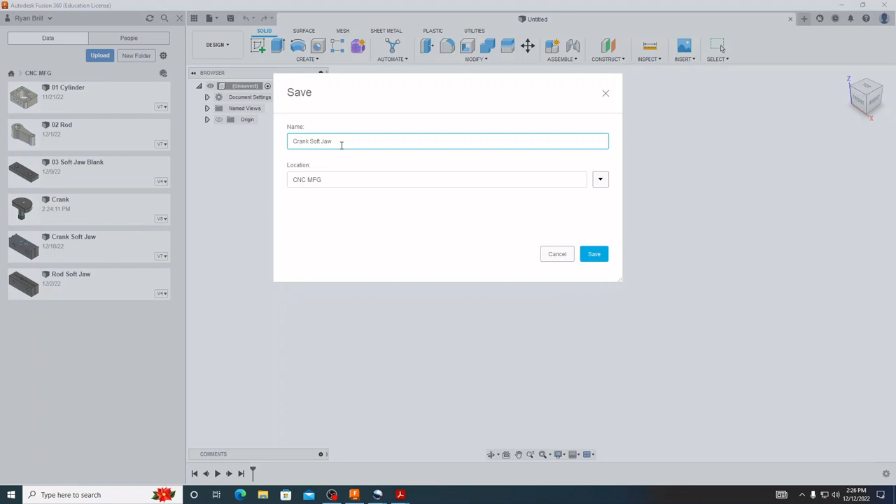Before we can insert our SoftJaw blanks into our file as an assembly, we need to save this file. So I'll call this our Crank Soft Jaw. I already drew this up before, so hopefully it won't give me any errors. I'll just call it 2. And we'll hit save there.

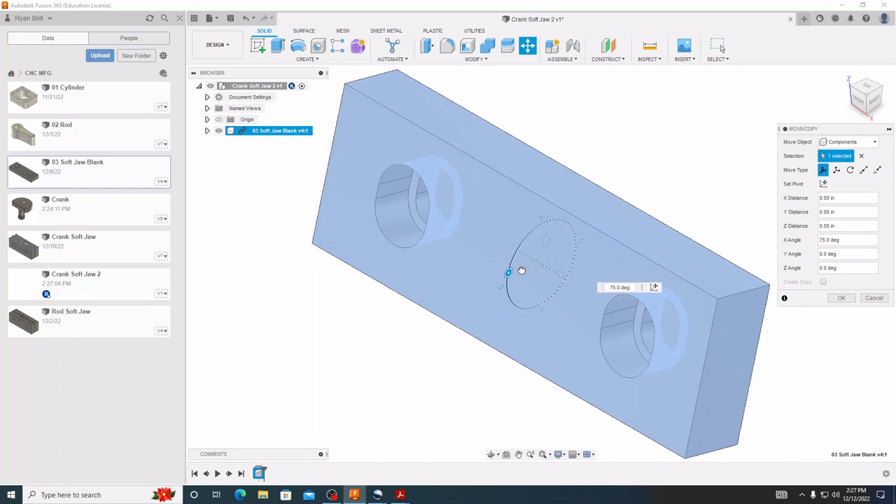To insert this, I right click on our SoftJaw blank and insert into the current design. To do this the easiest way, we want to rotate this. I'm just going to grab that radial right there and rotate it to 90 degrees, then press OK.

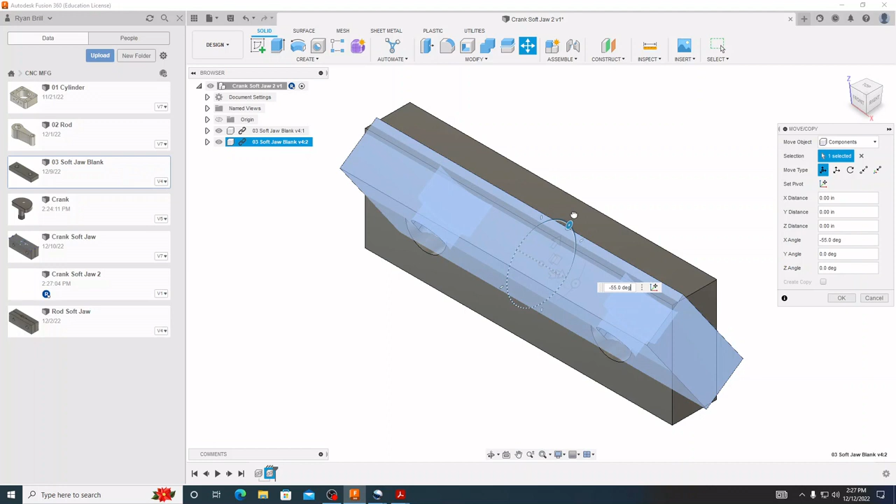Then I'm going to bring in another one and put it right next to it. We'll right click on our SoftJaw blank again, insert into the current design, and this time rotate it 90 degrees going the other way. I'm going to grab this arrow and drag it back, then press OK.

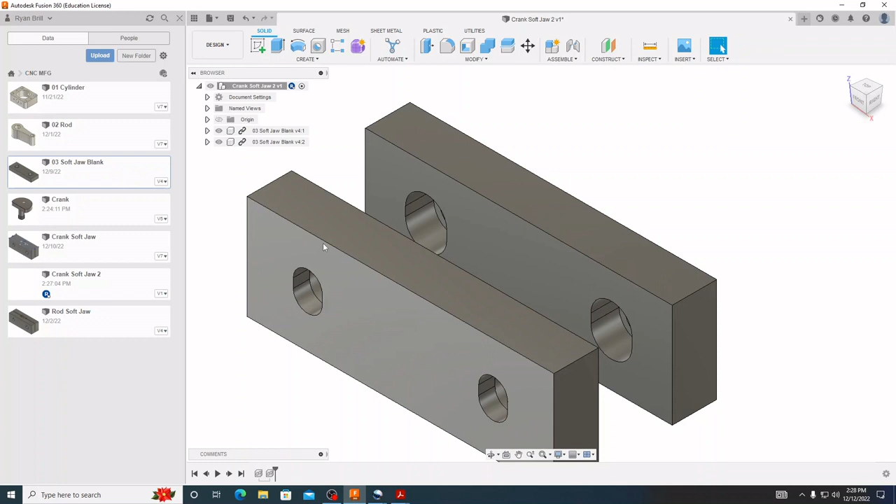The next thing I want to do is break the links on this. Right now, if I were to edit any of these, we could run into errors trying to edit that SoftJaw blank. So we want to make sure these are independent pieces from our SoftJaw blank, so that if we want to continue using the blank to make more SoftJaws, we have a fresh copy to use. I'll right click on the first one and come down to break link, and do the same thing for the second one. Alright, we can close that now.

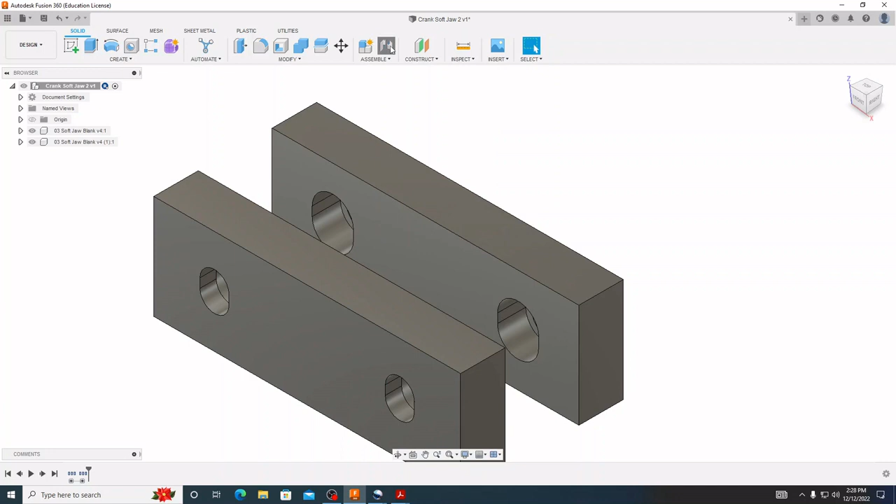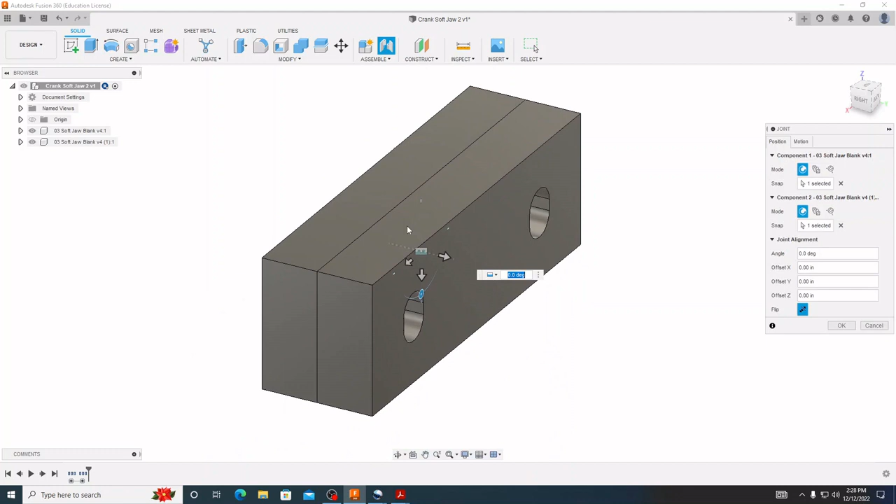What I want to do is assemble this into a joint, using a joint with our assembly. For this, I want to select the center face, or center of that face right there. You can see there are kind of stock box points from when you're running your CAM for your work coordinate system, but I'm going to select that one right there. I'll rotate this around and select that one right there, and it will want to bring it all the way together.

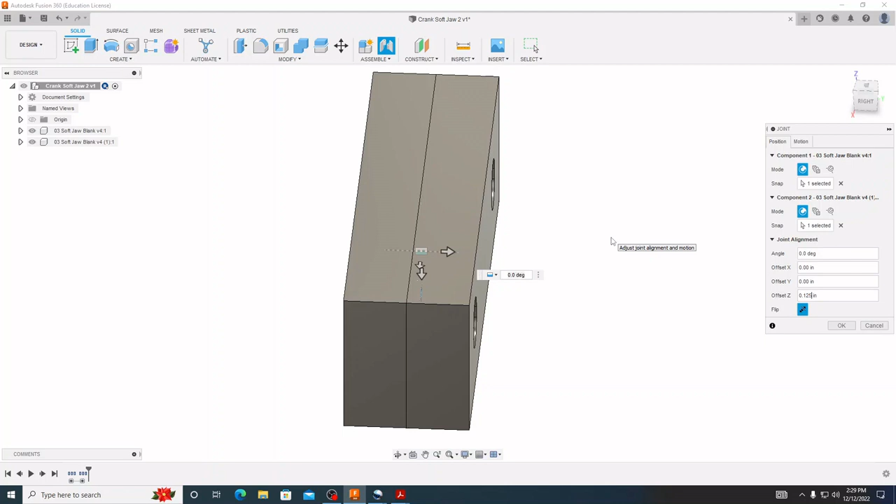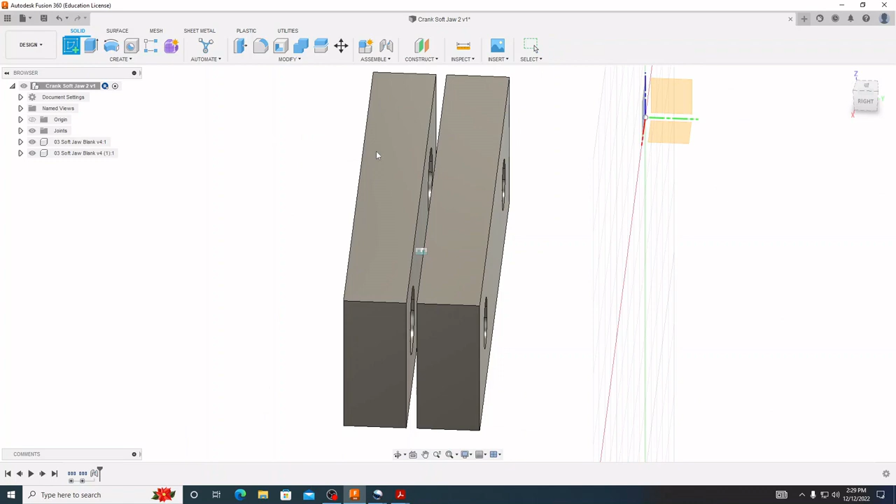The next step is to create this sketch on top of here and be able to cut that down. So back in Fusion 360, I want to create a sketch on the top of our part. It doesn't matter which one you select because we'll be able to use either of them, they're both at the same height.

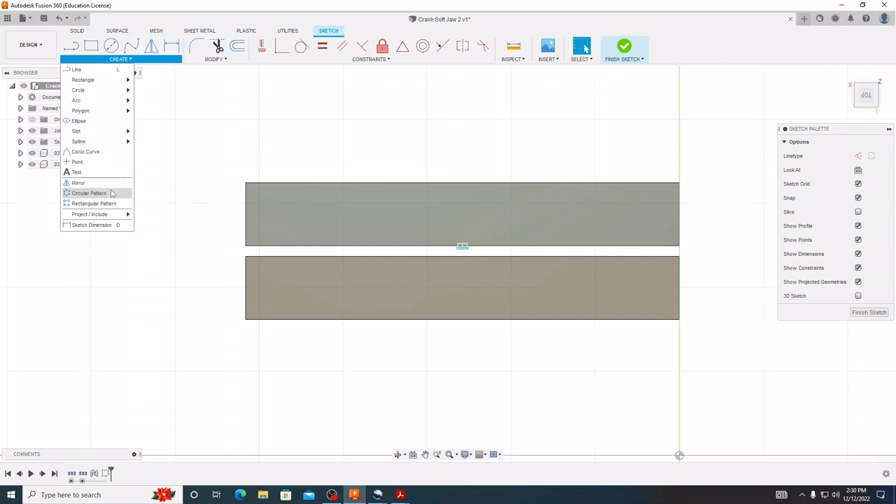Before I start, I need to include both of these to get the geometry. So I'm going to come down to Create, then Project. I selected this one to put our sketch on, and I need to project the geometry from this one as well as that one, and press OK. That will allow us to reference some of the geometry from this.

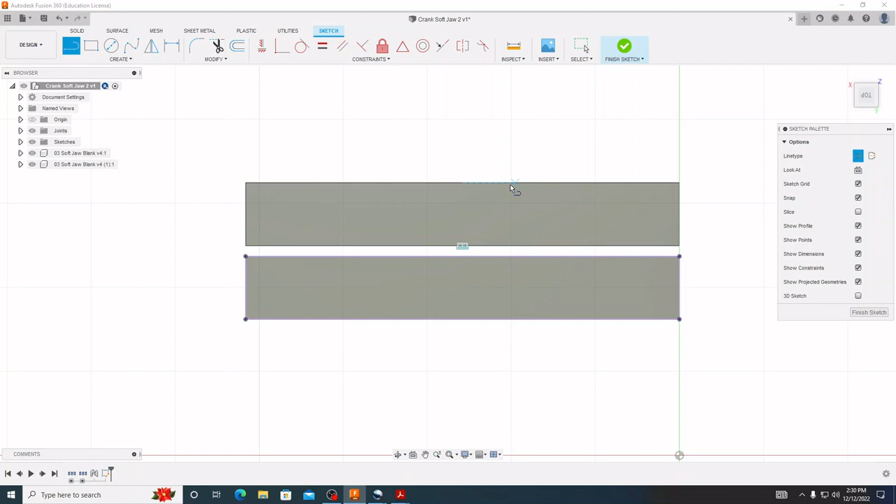I'm going to select my line, make sure we use a construction line type, and come over and find my center of this top one. You know it's the center when it snaps to the center of that line and you have a little triangle next to your X. So I'll click there, and come on down and make sure I snap to the center of this line.

This is very crucial because we want to get the absolute center point of this to be able to put where our cam goes. We'll go back to the print in just a second. So I'm going to take the center of this and draw a small horizontal line out, just to make sure we have a reference. This is going to be the center of our SoftJaws.

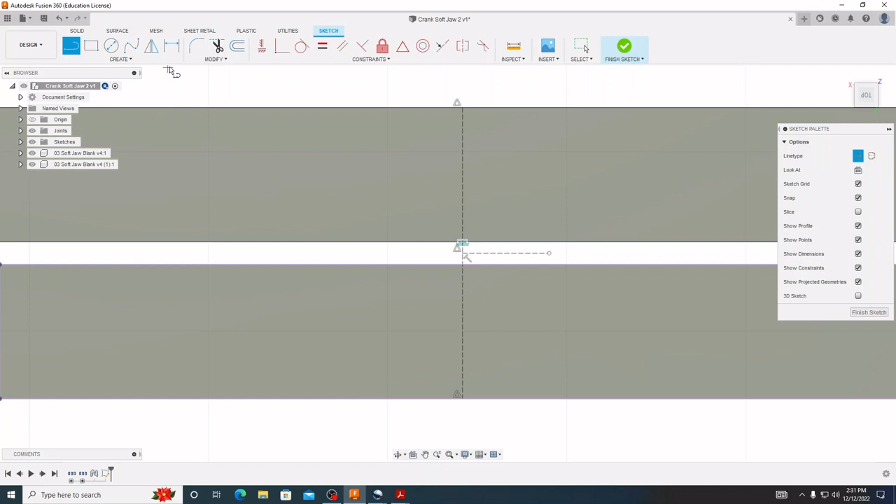That is going to be 0.276.

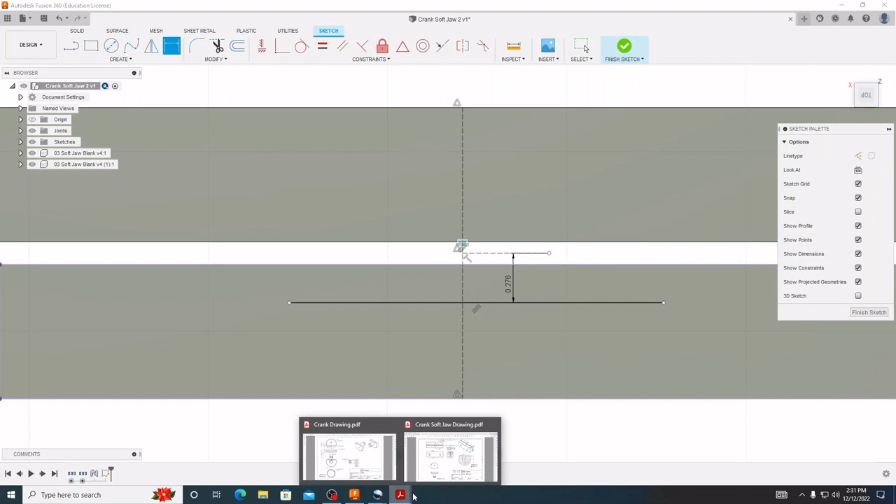So we'll go back to Fusion, and I'm going to create a circle that has a diameter of 1.25. The diameter, getting ahead of myself, the radius is 0.625. Multiply that by 2 and you get 1.25.

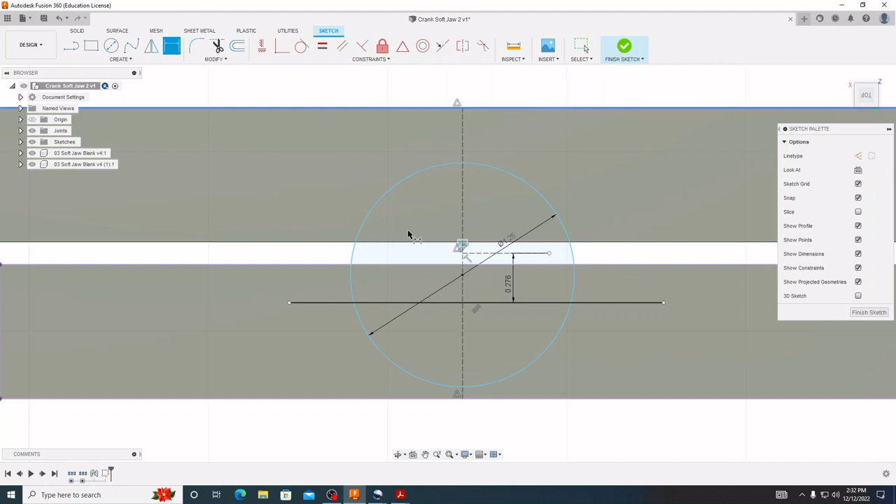So we'll hit that sketch dimension, and we want to go from this bottom line right here to the center point of that, and that is going to be 0.25. So you can see that it's a little bit offset. And when we draw this, that's going to be not only the center of the circle, but also the center of our shaft that goes down there.

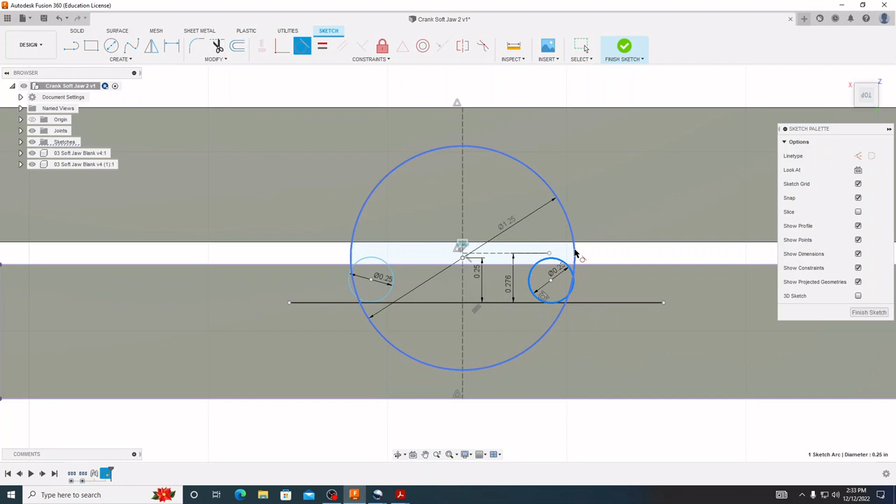So back to Fusion, 2 circles, 0.25 and 0.25, and I will make them tangent to the horizontal line as well as the circle, and same thing for that one. And then we'll be able to come in and trim away all of the lines that we don't need.

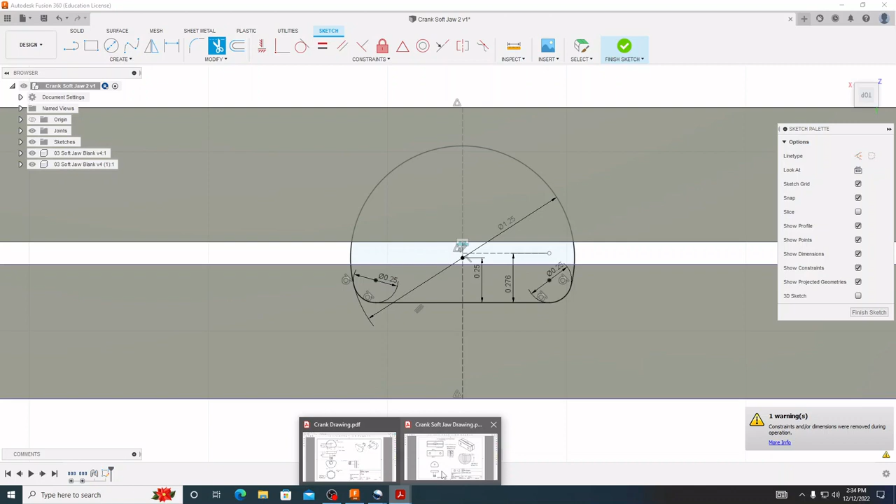And when we are done, we have a wonderful profile. So we come back to our prints, and we can see that it is extruded cut down 119 thousandths.

So back to Fusion, we can finish that sketch. I'm going to extrude all of this, and it is going to go down -0.119, and that's going to be cut into all of them.

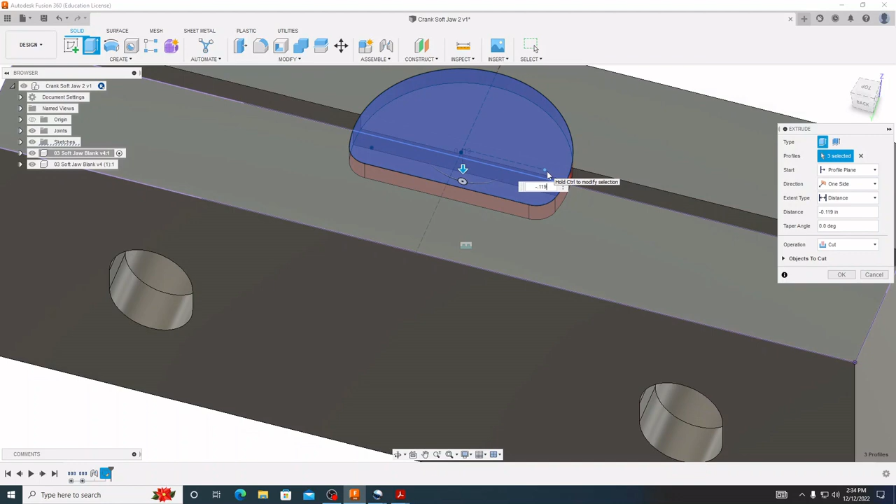The next thing we want to do is create a sketch to be able to cut that shaft all the way down. So I'm going to create a new sketch on the top here, and I want to keep this geometry separate from our first sketch, but I still want to use that center point from our first sketch. So under my sketches, to expand that, you press the little triangle right there. You select the eyeball, which is the visibility, and now I'm able to project that point.

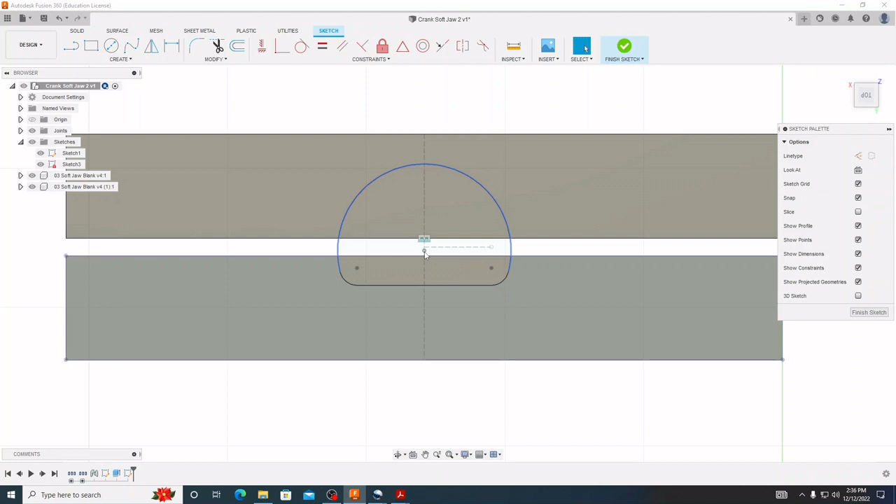And to be able to do that, we go down to Create, Project Include, select Project, and then I want to select that center point right there. And then I can hide that first sketch. And on this sketch right now, I have that center point.

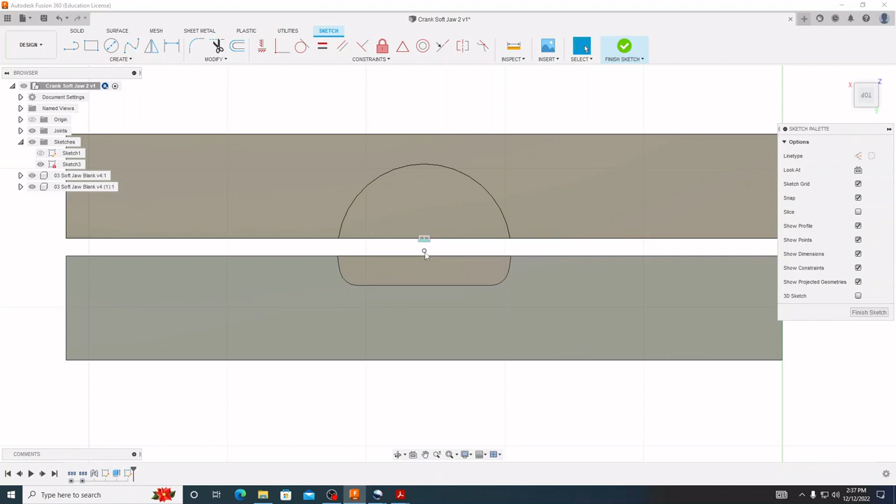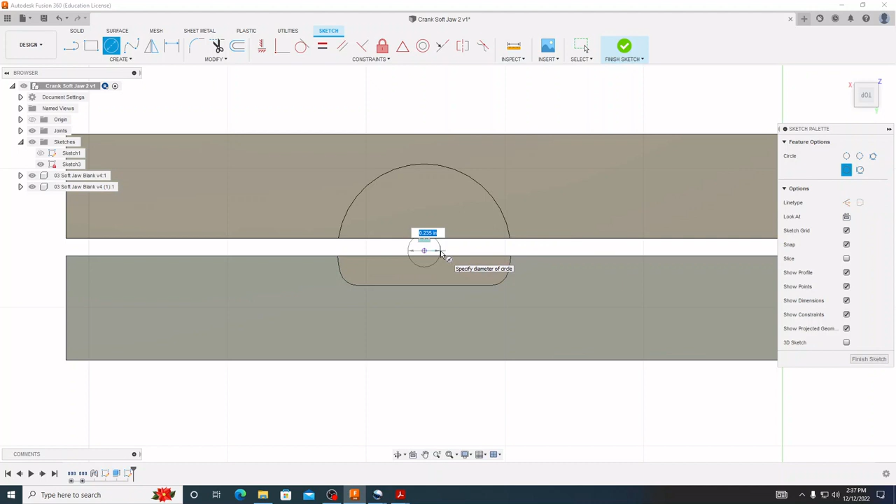So what I'll do then is come back to the print. We can see that has a diameter of 0.375, and that it is going to be extruded down from the top 0.894. So we'll create a center diameter circle from that center point. It's going to be 0.375 or 3/8 of an inch in diameter. We'll finish that sketch.

And as a reminder, it's 0.894 deep. So we'll extrude, cut that down negative 0.894. We'll press OK.

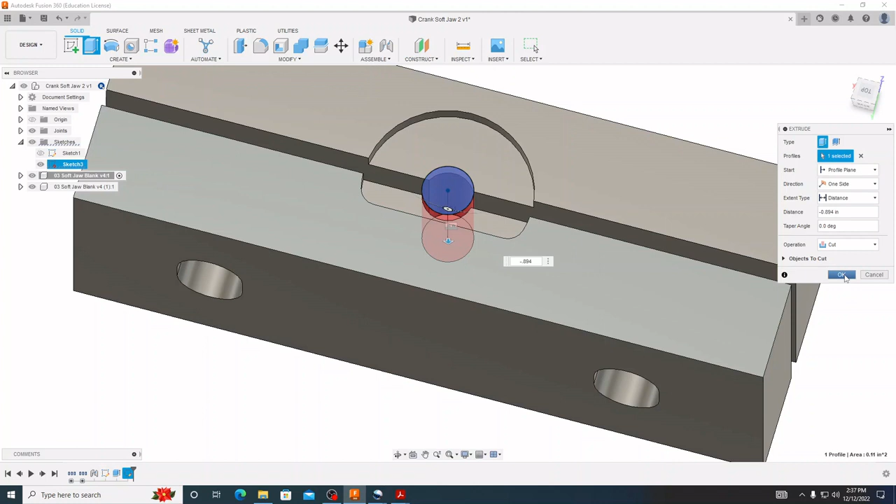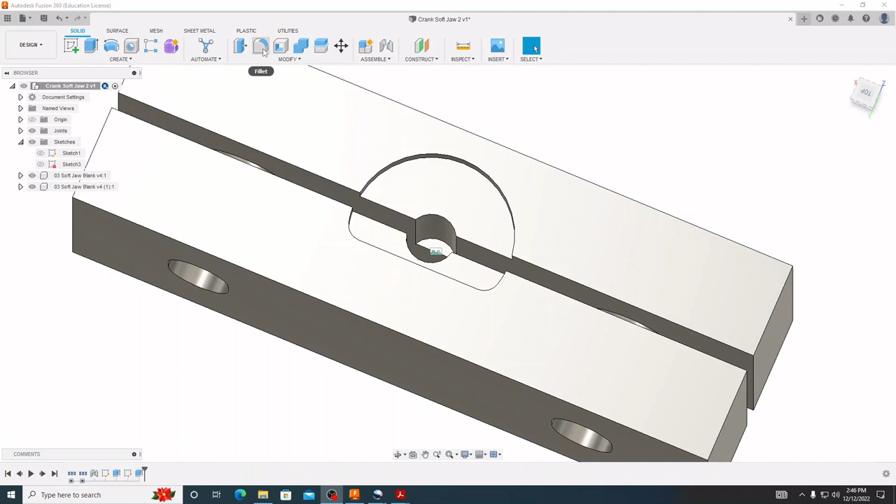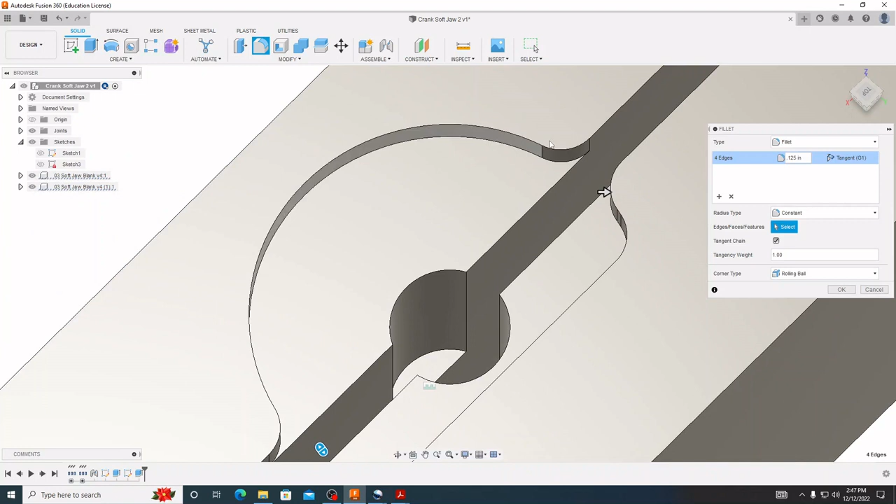All four of those, so we'll go back to our SoftJaw model, 0.125, and we'll select a fillet, just a little bit easier to fit our part in there. That edge, we'll press OK.

That edge, and that edge, and all four of those completes the CAD portion of this model. Make sure that we save it. And in our next video, we'll show you a little bit how to create our CAM for those. What we'll do is we'll press OK.

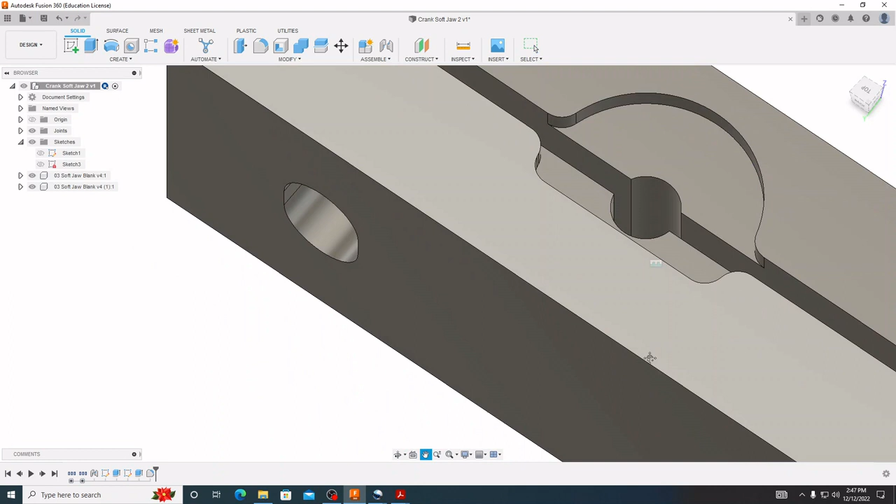That completes the CAD portion of this model. Make sure that we save. And in our next video, we'll show you how to create our CAM for this.